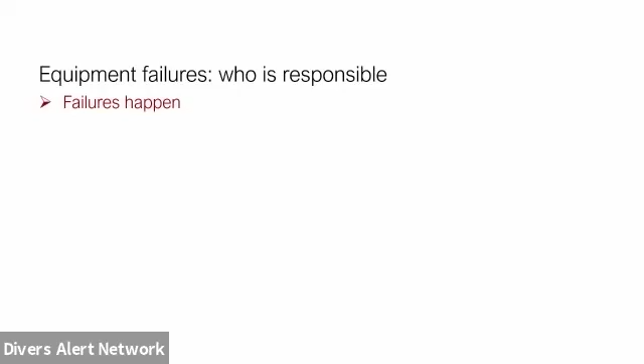But failures do happen. So even though we know all of this, even though people are trained, the equipment is properly designed, and we should know what we're doing, we still have accidents. We have an incident reporting system here at DAN, so we are able to respond to things reported to us. And of course, we also look through social media, look at the press, read reports, and hear other people speak about accidents that they've gone through.

And in the last 3 years, we've had 21 of these, we call them significant accidents, that we've become aware of. Obviously, there are many more that we aren't aware of. But these were enough for us to actually consider what caused the accident and how we can go about educating people, or perhaps speaking to the manufacturers to prevent these from happening again. Because ideally, we want to make sure diving remains safe.

Yes, there are cases where the manufacturer perhaps has one or two shortcomings, but if you analyze the actual incidents and what went wrong, you'll find that the manufacturing flaw in most cases is really only a tiny contributor to the bigger picture. And when we, because I certainly do, discuss these things with the manufacturers.

If they need to make a modification, they consider that. Or in some cases, when these things tend to happen more frequently, they'll issue a safety notice, a recall, and they will obviously make design modifications to ensure this doesn't happen again.

But actually, most of the time, we see that accidents happen as a result of either inadequate training or certainly skills that have diminished over time, people not taking care of the equipment, physically manhandling it or letting it lie around, or not having it maintained as it should be maintained. The manufacturers have good reason for giving you maintenance instructions.

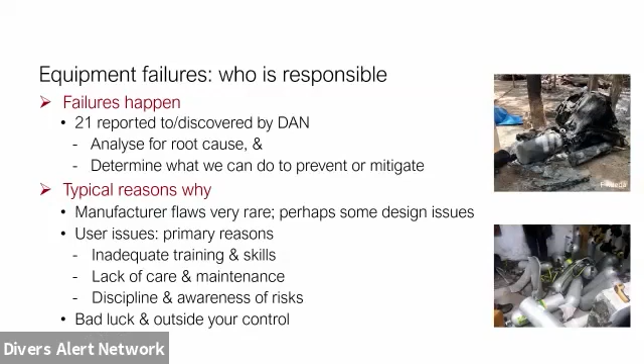Yes, we have to add that there are sometimes things outside of our control, and sometimes it's just bad luck. And bad luck can happen early on in the chain. We can get away with things. We can overfill cylinders many times, and nothing happens. And then one day, if we've overfilled the cylinder, there's a crack, somebody drops something, and that's when the accident happens. So it's a sequence of events.

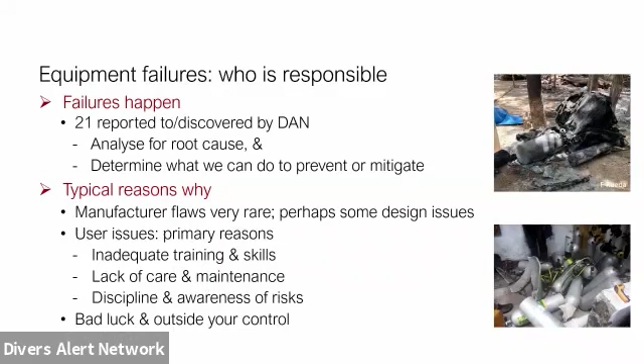So we're going to look at these incidents over the last 3 years. I'll just give you a brief rundown to categorize them, and then we'll go into some degree of detail with some of them. So when I look at risks, my traditional way of looking at anything in terms of a risk is, what is the equipment, the mechanical issue that we face? Is there a fire, an explosion issue? And then what are the human factors? What effect do these things have on people?

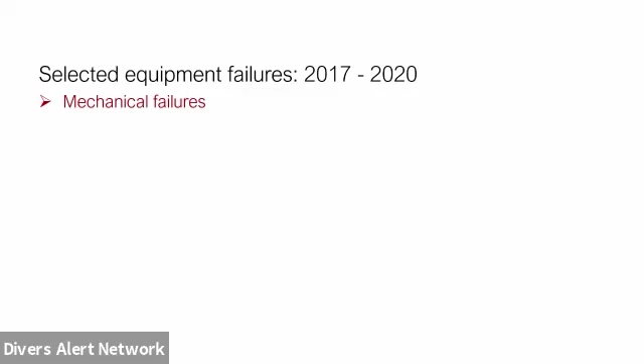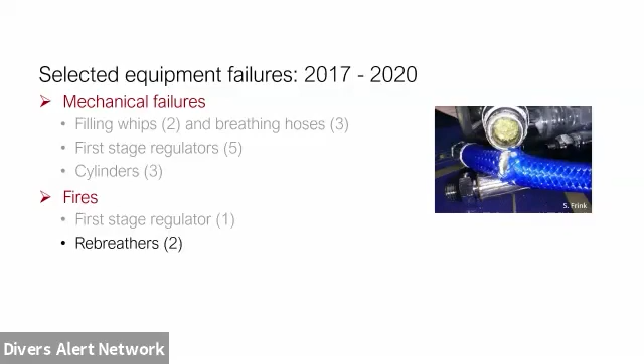Then we've had 3 significant cylinder explosions, and I'll discuss one of them with you. In terms of fires, we've had 1 first stage regulator fire, and that's the one I'll discuss with you, and then 2 rebreather fires. And in all 3 cases related to pure oxygen that was contained in the cylinders.

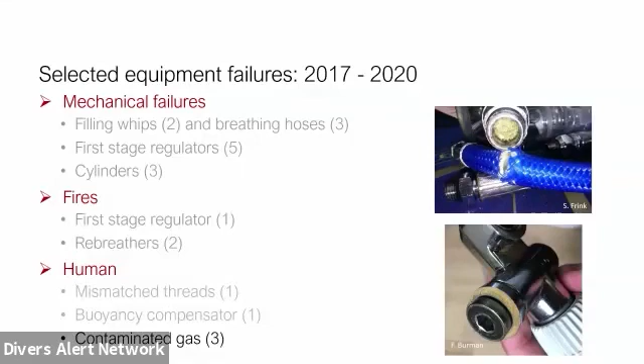And then lastly, human errors, things that we do wrong as people. There's one very sad case with a mismatched thread, and I'll give you some details on that. A slightly less significant one on a buoyancy compensator that failed, and then something that presents itself continuously. No matter how much we bring this to the attention of the diving world, we have issues with contaminated gas. And remember, you're down there, you get to a certain depth, and then the contamination starts to take effect. And we'll have a look at some of that information in a moment.

So let's have a look at the first of our incidents. This happened just before DEMA last year. The person that it affected was a very experienced, let's call him a leader of the diving section at a university in the Caribbean, and filling cylinders is something he still does every day, before the students get ready to go out and dive.

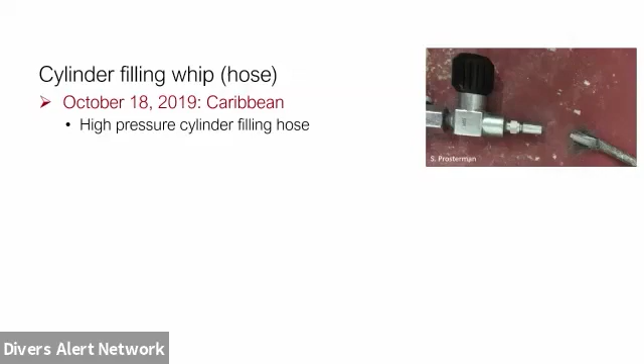And it happened to the filling hose. He was just finishing up filling a bunch of cylinders and something went wrong. So the hose itself was clearly rated for the pressure, 3,300 PSI filling pressure, and the hose was rated to 4,500 PSI, which means pressure tested to about 7,000 PSI.

So it wasn't a weakness in the hose design, I should say. Service history, about 9 years in operation, which in most cases is a good time to start considering changing things, but by no means would we expect a failure. And he does regular visual inspections every time he connected the hoses to the cylinders. He would check that there's no sign of any mechanical damage, but it failed.

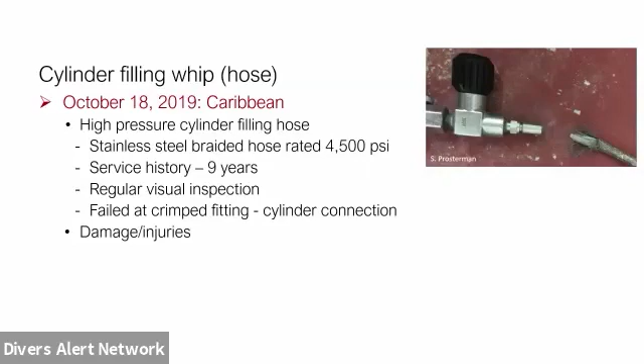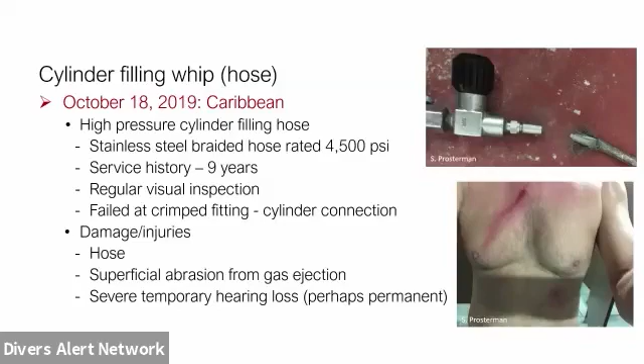So the compressor was obviously still running to some extent, and there was high pressure gas in the hose, and it very narrowly missed his eye. I'm not showing you that particular picture. He says to me, it looks worse than it is, but I think that's enough stress when something like that happens to you. And he is concerned now, and we're talking of a couple of months after the incident, that he's probably going to have some permanent deficit in his hearing, because clearly when hoses break, the noise level is tremendous.

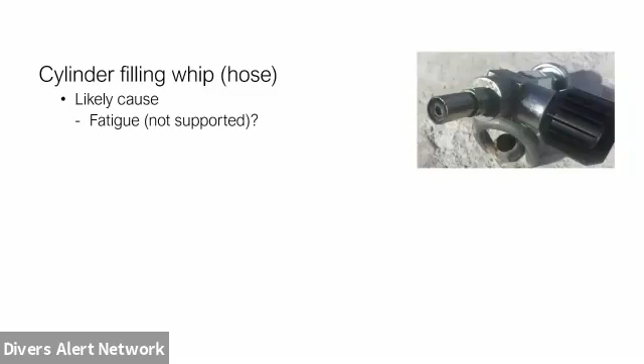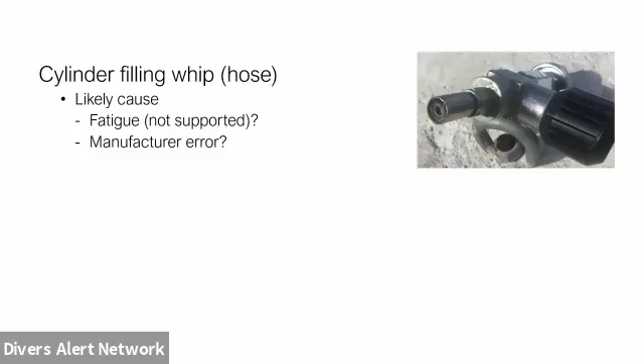Okay, so what would cause this? And it's a difficult one to answer in the context of many of the other examples I'm going to discuss with you. So yes, it could be fatigue, because, come back to this, we don't tend to support our hoses when they are being used to fill. And yes, potentially there could have been a flaw during manufacturing, but 9 years is a long time, and thousands of fills with this particular hose. So one wouldn't expect there to be a manufacturing flaw.

But of course, sometimes it's a very minor flaw that then grows over time. So we can't really state with any certainty what went wrong, but we can certainly make recommendations as to how to either prevent it, or if it does happen, to put ourselves in a position where we don't get hurt. So on the technical side of it, clearly we need to make sure we use certified products from people that we feel we can trust, that have a good track record in terms of safe products.

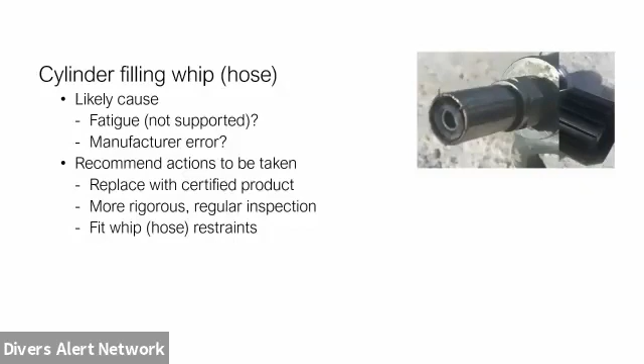We want to maintain our inspections and perhaps look a little bit deeper when we do our visual inspection, when we're coupling up the hoses. If you look at the picture above there, no sign of any corrosion, so nothing that you would immediately say, hang on, this has been neglected. And he says there was no sign of the braiding coming loose at all. But a very wise thing to do would be to fit a whip restraint.

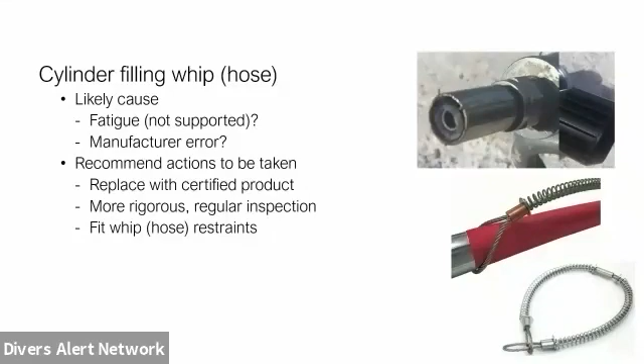And from where I come from, and I've had a fairly long history in not only recreational, but also commercial diving and diving equipment, these are compulsory in many industries. They're not compulsory in the scuba diving industry, but they're relatively low-cost items, and we can fit them to both ends of the filling hose. And if something does go wrong, or somebody opens something they shouldn't open, then it will contain that hose and prevent it from lashing around and causing any injury.

And then very important for those of you that are actually filling the cylinder is to be aware of this risk. I know in the beginning when you fill your first few cylinders, you feel a little bit apprehensive, but months and months later, it's old hat for you, and you really are not going to pay the same attention that you did in the beginning. Always make sure you do visual inspections, perhaps bend the thing a little bit where the joints are, just to make sure nothing's come loose. And most of all, if you don't need to be next to the hose or next to the cylinder during filling, then don't stand around there. So pretty basic stuff. Nothing we can really point a finger at, but again, it happened.

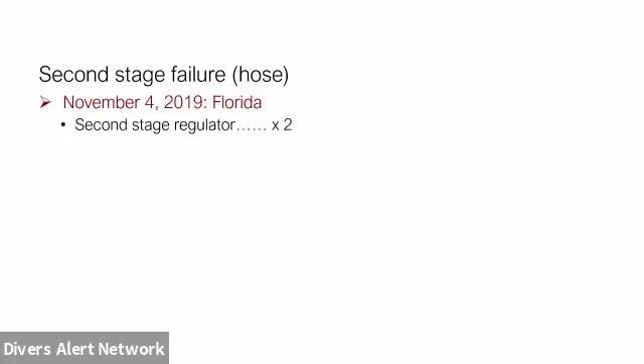Second one is an interesting one, and this is a follow-on from the articles we published in Alert Diver. It actually first started about 5 years ago now, when a colleague of mine had an air out, and so she took the regulator out of her mouth and finished her dive on her octo, which we wouldn't normally recommend.

And when she got to the surface, got back home, she pulled it apart, and lo and behold, we found these what we then called crystals that had clogged up in the hose and actually in her demand valve, in her second stage regulator. So we know about this, and we know it relates to inappropriate material selection during the manufacture of a series of braided hoses that did not come from Europe, and they weren't made here in the US. So we'll just leave that there for now.

This person who reported it to me, I had a long discussion with him on the telephone, and we've exchanged many notes since then. Preparing for a cave entry, he was getting himself ready, took a breath out of his demand valve, and it was clogged. He got a mouthful of debris, which is pretty interesting in itself for the debris to actually migrate through the tiny opening that you have in a second stage. Anyway, he switched to his other regulator and found that he still couldn't breathe properly.

So he surfaced, took the equipment apart, found that he had noticed before that his BC had inflated slowly, which was another good sign. And he had read our articles, and he knew about the failure of braided hoses, but hadn't really paid attention, doing his inspections as you should perhaps have done. He had 3 braided hoses. So both of his breathing hoses were braided hoses, and his inflator hose was made of braided hose construction too. So we have both of the demand valves clogged, and we have an inflator hose that is soft and squishy. So he started to put things together.

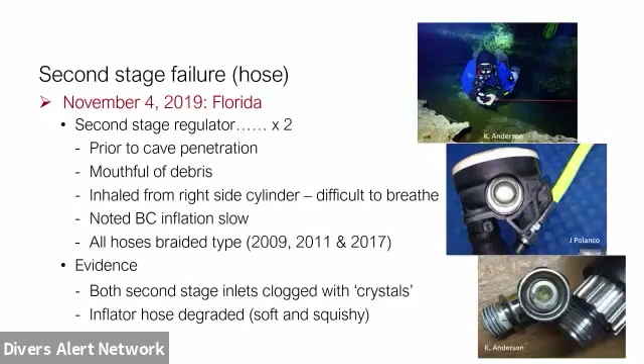When he inspected the hose, he realized that this thing wasn't working as it should work, or certainly didn't appear to be in the condition it should have been in. So the likely cause, well, we know about degradation of braided hoses, and this is what had happened to his BC inflator. But the mystery is, he sent his equipment to us, and I sent the hoses back to the manufacturer, because these were certified hoses from somebody that we work with. And they wrote straight back and said they've cut this thing into pieces. There's absolutely no sign of any degradation, any particles, any damage whatsoever.

So that's interesting. He definitely had an air out. He had his mouth full of debris. So something clearly went wrong. And we could see clearly that the inflator hose had degraded with time. So it's now a mystery. And it is a mystery until we're sitting in my office, and I got a hint from a colleague out in the Caribbean who said to me that they'd seen some similar things before.

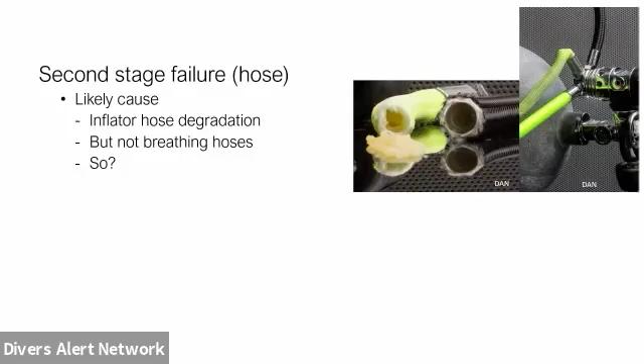So another colleague of mine in my office decided to experiment with this, and we attached the degraded hose to a regulator, the same as the diver was using. And we attached the breathing hose to the other side, and then I wiggled it around and let gravity do some of the work for me. And lo and behold, we got crystals coming out the other side. So what you can see over there, and I'll show you another picture in a moment, is the regulator that was used, but it's not unique.

There are many regulators that have the same feature, but the gas goes through from the high pressure to the intermediate pressure stage, the hub at the bottom, and that connects to your breathing hoses, your inflator hose, your dry suit inflator, and it has a common area. So if one hose were to fail, in this particular case, degrade so that those pieces of degraded plastic start floating around, then when you get to the surface and you purge, you're going to get flow in the direction of the purge. So the particles will move from where they started from through the regulator into the other hose.

Or when you're carrying your equipment, shaking it around, or just purely from gravity, these crystals can actually migrate. And I call them crystals because that's what they look like, but they're actually just hard pieces of brittle plastic. So really important to do your inspections. In our articles that we published, we gave you some clues as to how to go about checking your braided hoses. They're great. They're nice and flexible. They take the strain off your mouth when you're diving, but one just needs to pay attention to them. If you buy the reputable types, after 2009, certainly we find that we haven't seen any significant failures. And I say significant because sometimes it's hard to actually tell when the hose was made.

When you send your regulator in for maintenance, please make sure that the techs report anything that they find to you, especially if you're a bit concerned about things that weren't working as they should work. And lastly, be aware of what this issue is.

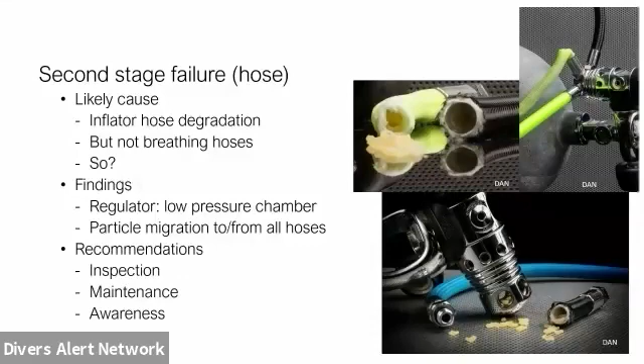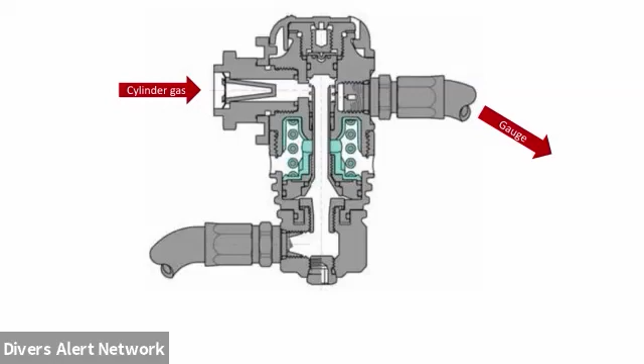And just to illustrate it a bit more clearly for you, here's a cross-section of a regulator. We can see our high-pressure cylinder gas going in through a filter, so the particles can't come from upstream into the breathing section. Of course, you've got your pressure gauge also connected to the high-pressure section.

Then we have our regulating of the pressure down to your intermediate pressure, and from there it gets distributed from a common area. So the pressure to both of your demand valves, your second stage regulators, and to your inflator hose, or if you have two, one for your dry suit and one for your BC, they all come from a common port.

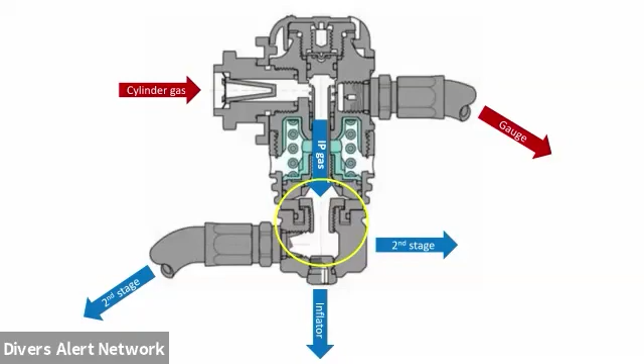And it's not for us to say it's a design flaw, it's just a characteristic of how the design is done. And the degraded hoses have been a feature only for the last 5 years, and as people get more and more aware of them, they're paying more attention, but certainly something to be aware of. So practice your buddy breathing and make sure that you're equipped. If something goes wrong with breathing, you have plan B.

Okay, the next one is an interesting one, for those of us with aluminum cylinders, you might call them, not from where I come from. Obviously with time, and certainly the presence of chlorides, they will start to corrode, producing a white aluminium oxide powder. In itself, not a big problem.

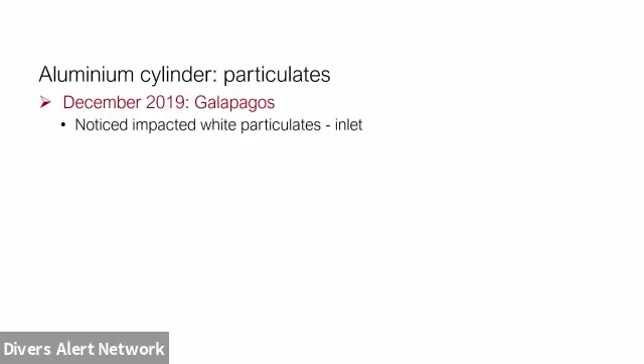However, in this particular case, the diver was on a liveaboard in the Galapagos Islands, great place to be, and she noticed white particles on the inlet to her first stage. That was a bit strange, so she took a toothbrush, wiped off the external particles, not realizing, of course, that there are particles on the other side of the filter. And she went back diving, and a few days later noticed the same particles on the inlet. So where would the issue be, and now what is likely to go wrong?

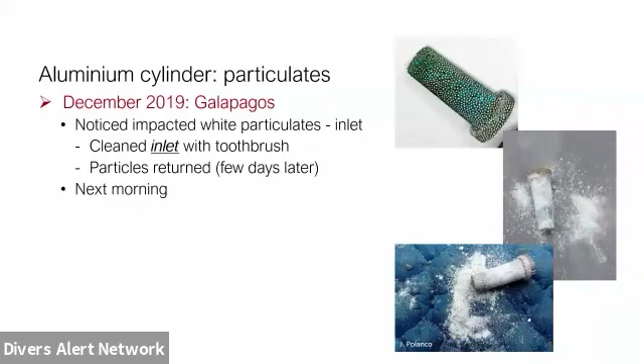Well, after her last dive, she woke up the next morning with no voice. She was coughing, her airways were burning when she was trying to breathe in, and she'd also developed an ear and eye infection, although we don't see a correlation there. So she returned home, went to see her doctor. He assumed it was a form of pneumonia, all the signs were there, gave her antibiotics, and 7 days later, her lungs were still burning.

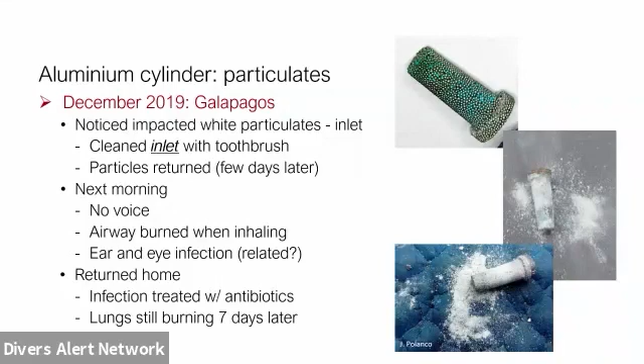So there was something really, really strange here, and we got the report, obviously, after all this had happened. So, okay, aluminium oxide powder, we know it's produced in the cylinder. The powder can range from 1 micron up to 10 microns. Of course, if they make aluminium oxide, you can make any size you want. But the powder we see, some of it can migrate through the filter. Your inlet filter is usually between 6 and 10 micron pore size. So anything less than 6 microns is going to migrate through the filter as a powder.

And she had noted, I should have mentioned it on the last slide, that on the inside of her second stage, she saw this white powder. And we've actually had another case recently where it was a brown powder on the inside of the breathing regulator. This is a long-term accumulative effect. The picture you can see over there has happened over many, many dive cycles or pressurization cycles, and clearly not good maintenance.

What we know from the medical theory, and I'm just going to quote it, I'm not a specialist in this particular regard, is that particles larger than 5 microns tend to irritate our upper respiratory tract. So that will be coughing, burning throats, and anything else that gets stuck in the throat and makes breathing difficult. The particles smaller than 5 microns, which we know we get, and you can see the dirt on that filter, the oxide is on the inside, it's not in the inlet.

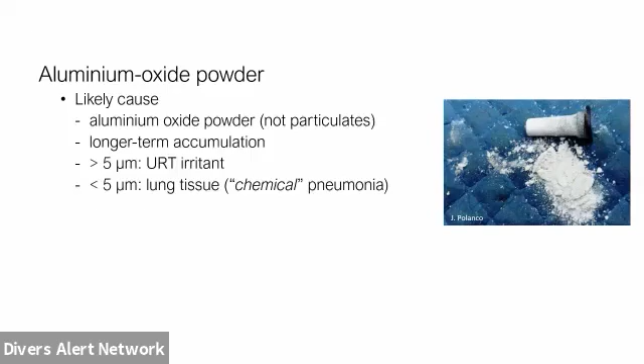When it's smaller than 5 microns, it accumulates in our lungs and the alveoli, making it difficult to breathe and causing an inflammation. So all the signs are there of regular pneumonia, and for lack of another word, we dub it chemical pneumonia. And of course, those with some form of respiratory weakness are going to suffer even more.

If you look at the standards that we set for particles, it's actually not very well documented. A lot of work has been done, and I actually published a fairly in-depth article in the last Alert Diver if you're interested in learning a bit more about this. And they usually clump it together with oil and other particles, so they're not very well maintained and monitored as time goes on. But generally speaking, we don't get dust getting through.

So a real good clue is if you see any form of white powder, brown powder, black powder on the inside of your second stage regulator, please be aware that should not happen. Nothing should come down your breathing hose, and catch that in time before you end up with an issue. Clearly, things need to be serviced. And again, I put that picture up there for a good reason, poor maintenance. I don't know how many years of use that particular first stage regulator had.

And then just 2 notes to add for you. A lot of things are said about aluminium oxide and people that work in aluminium factories and people that are metal workers with aluminium, that aluminium is carcinogenic, that it can be toxic, that it can actually cause Alzheimer's. But this is all anecdotal reports, and I've actually myself been involved on the Alzheimer's side with people working for me that then reported with this. But there's no scientific evidence to support this.

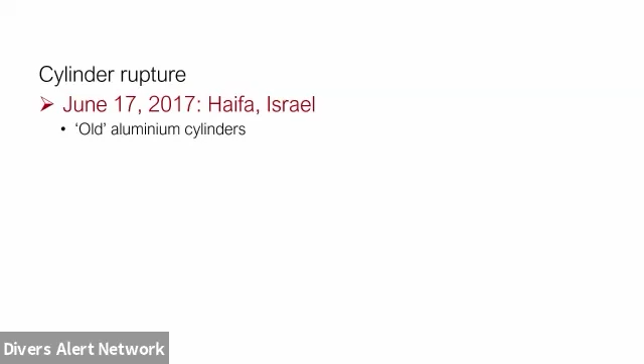Okay, here's a very sad case, and it gets played over and over again, and it's sometimes really difficult to come to terms with why people don't learn these particular lessons. So this one happened in Israel. We got some pretty good reports because one of our colleagues was flown over there to actually investigate what had happened. And I refer to these as the old aluminium cylinders.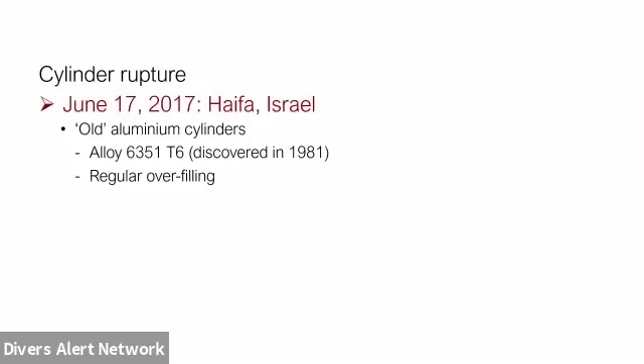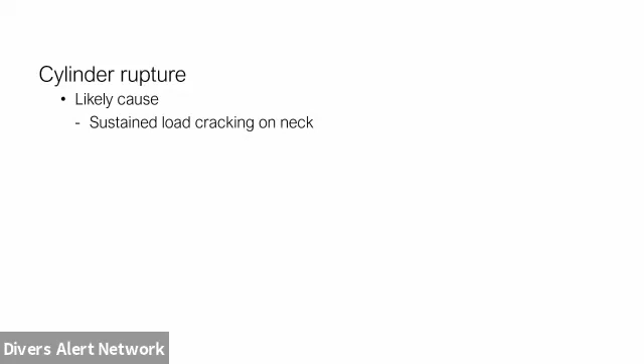We know that the sustained load cracking doesn't happen in every single cylinder, but that's why you have a visual inspection requirement that must be done annually, and this is what they look for. Here you can see, hopefully it's clear enough for you. I can't get the mouse to work. You can see over here, try it like that. You can see the crack running down over there, which we're trying to highlight.

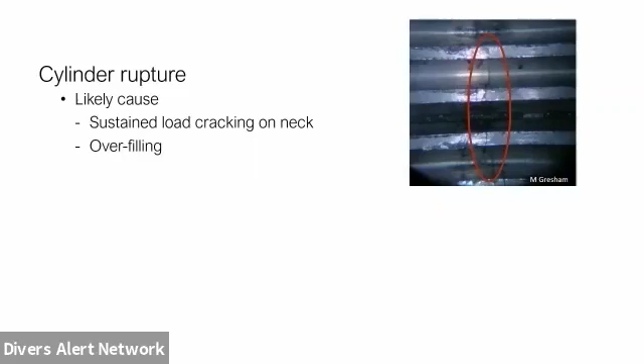And all that requires is a degree of overfilling and some abuse, and obviously lack of inspection to pick it up before the time. And that day, after years of overfilling, physical abuse, we suspect lying in the sun for long periods of time, which over a long period of time will start to anneal the aluminium. Well, that was unfortunately the day that it happened. So we know for very good reason that the requirements are to do your visual inspection annually.

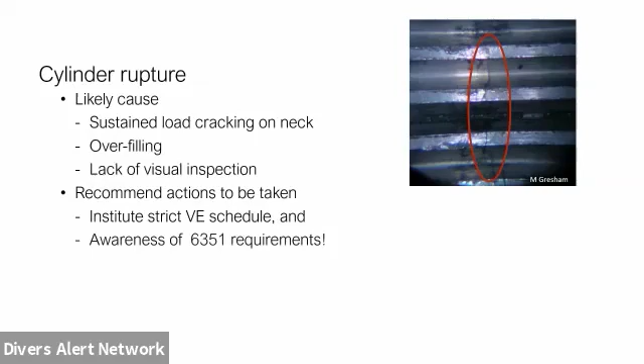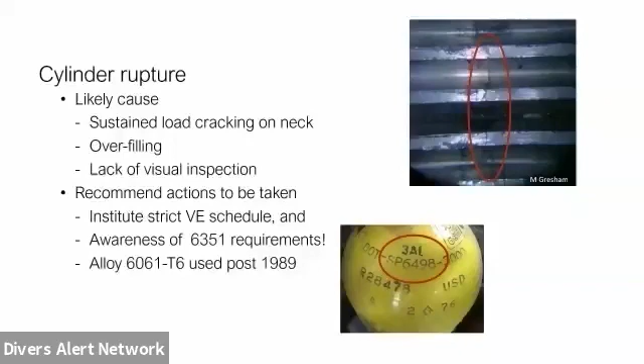We also want you to be aware of the 6351 requirements, and unfortunately, the cylinder is not marked with the same number of digits. So 6498 refers to the special permit issued by the Department of Transport. It's not the alloy of aluminium. The 3AL stamped above, together with that special permit, tells us that that's still 6351. Since 1989, all the manufacturers that make these cylinders are using the 6061 alloy, which doesn't have the weakness or the propensity to have sustained load cracking in it.

And just to fill in the last blank, make sure that when you get your cylinder, if it is aluminium, and I'm talking now more for the professionals, the filling station operators, look for the year of manufacture. If the year of manufacture is after 1989, then we know for most of our cylinders it's going to be made of the right material.

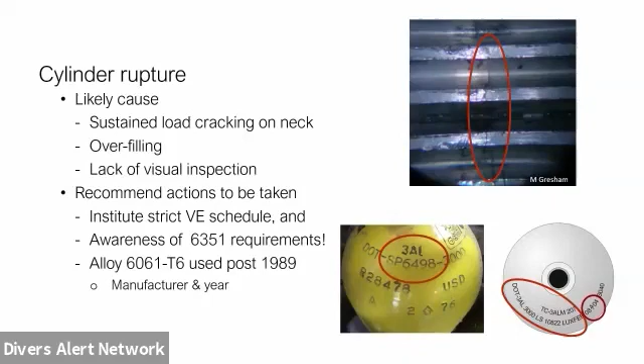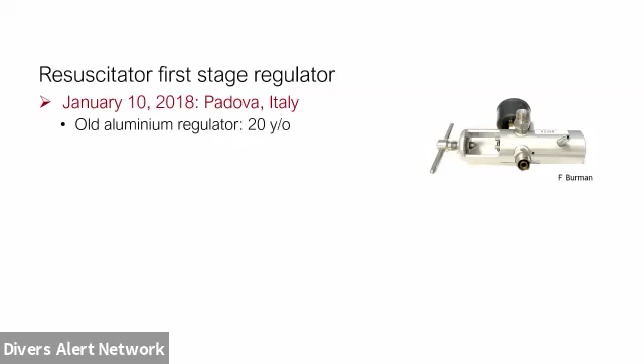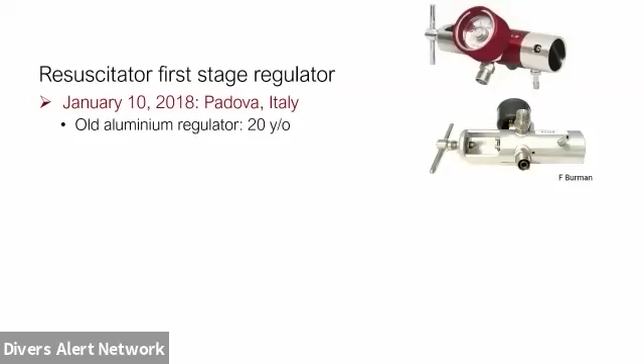Okay, let's have a look at a couple of fires that have occurred and that we've managed to analyze to some degree. So this one was a very old aluminium multifunction regulator used in our Resuscitator kits, and it was actually being used to train on one of the DAN emergency oxygen courses. Now you can see the aluminium one there. That was withdrawn from service many years ago and replaced with a brass multifunction regulator. So those of you that still have aluminium multifunction regulators, they're old, you really do need to replace them. I've seen boxes of these regulators at some of the testing laboratories, all of them having shown signs of fire on the inside.

So they're doing the training. He opens up the cylinder valve, and now the reports get fuzzy. And this is always one of the interesting things in accidents. First-hand reports, witness reports, and then the reports that come in a bit later, almost as if people are trying to cover up for what they perhaps did wrong. And the first report I got said that there was a leak on the demand valve hose, which they then fixed by tightening up the hose under pressure, which in itself is not a wise thing to do.

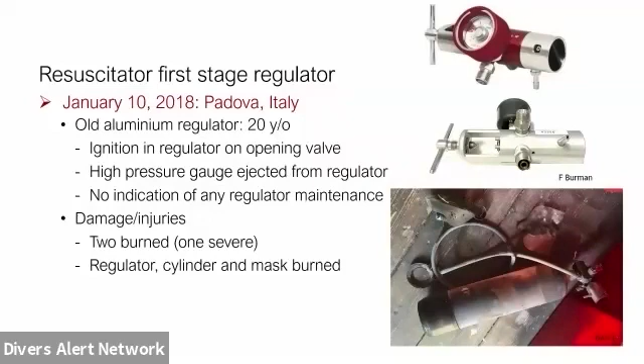But there was a fire and it blew out the gauge. We don't even know where the gauge ended up. And clearly you can see that all the equipment has been burned over there. There was no sign of any maintenance done on this regulator. It was dirty. There were still parts of contaminants that hadn't burnt on the inside when they analyzed it. Both the student and the instructor were burned, the instructor particularly badly. So not something that we want to take lightly.

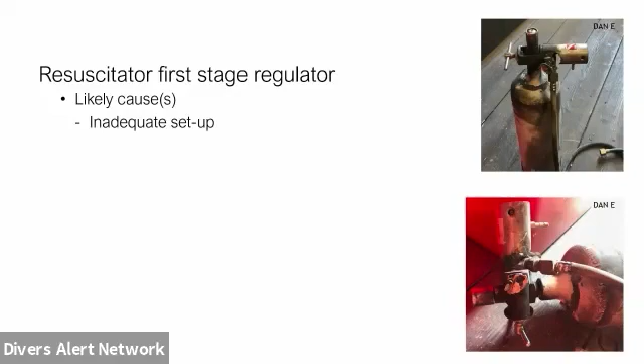Okay, when it comes down to causes of fires that relate to any oxygen application, we have three parts of a triangle that we can identify and hopefully come to a better way of dealing with this. We need a source of fuel, typically contamination. We need a source of heat, that's the part that's a mystery. And then obviously we are bathed in oxygen.

We can't avoid that. Contamination, usually in these instances, is fingerprints, people touching the pin index valve on the cylinder or using the thumb to locate the seal on the regulator itself. Could be some inappropriate grease, could be dust. Difficult to pick up afterwards what the fuel source was. The trick here is the ignition source. What actually causes the fire to start? With flow-related issues, we're looking at flow friction, which means rapidly moving oxygen, but that shouldn't happen in this case because an oxygen cylinder valve is designed to limit the speed of flow through the line and through the parts after that.

Particle impact and adiabatic compression are the two that we are more or less settled on as being the main causes of oxygen fires in our industry, in the scuba industry. Particle impact usually comes from inside the cylinder or could be dirt when the cylinder was last serviced. We don't really know where they come from unless they're on the outside.

And adiabatic ignition, heat of compression as we call it, occurs in this particular instance when we open the valve too rapidly and the gas starts to move at great speed from the high pressure cylinder and then all of a sudden comes to a halt inside the regulator because the regulator is not flowing at this particular time.

We cannot state with certainty what happened. We can't even state with certainty what the fuel was. We can see where it occurred, and then from there we have to add the elements up. But it can be avoided. Each one of these cases, there's been a human interface that has caused the issue. So very important to pay attention to the setup.

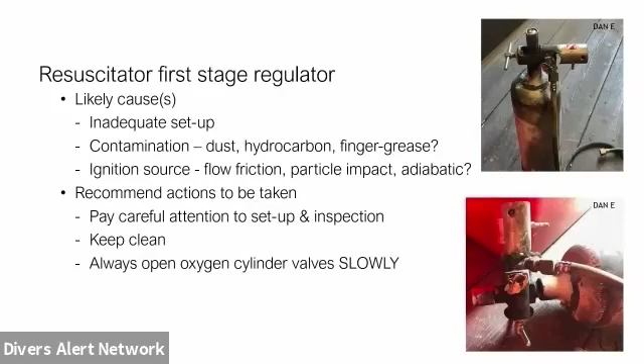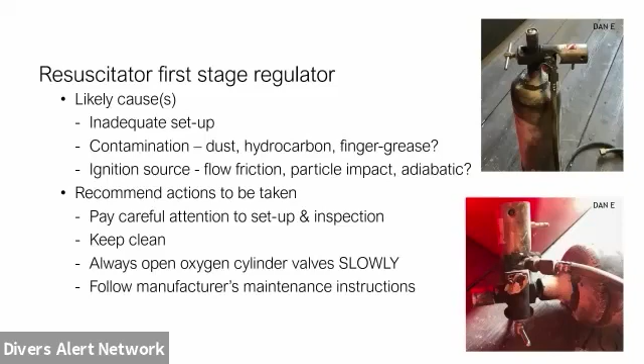Okay, and clearly manufacturers study their products, or when they're doing the design, look at the things very carefully and decide which are the parts that need to be serviced. And they are very conservative, knowing that some of us abuse these things. So the service intervals that they recommend are really important. You can stretch them, sure, but it's when we stretch them or forget about them that things go wrong and we have our failures. Now let's have a look at a rebreather fire.

I know there was one that they had in Bonaire earlier last year. This one happened to be in Mexico. They were doing cenote or cave diving. Very, very experienced diver. Again, in most of these cases I'm reporting to, I've personally spoken to either the person that was involved in the accident or some of the witnesses. So our information is pretty accurate, although, as I said before, witness reports tend to change with time.

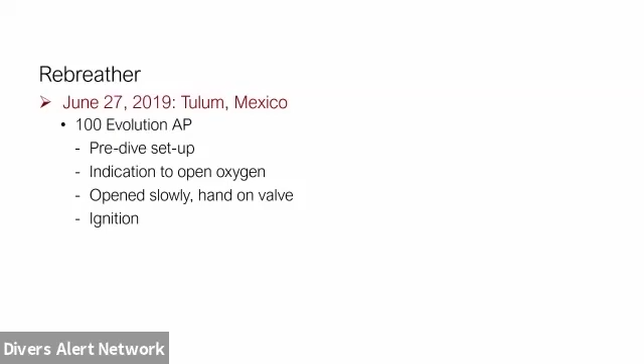So he had a great rebreather, very well maintained. He knew what he was doing. He was getting ready on the land, still doing the setup, and the instruction is open the oxygen. So he opens the valve slowly because he knows what slow is, and there's ignition. So he was badly burned.

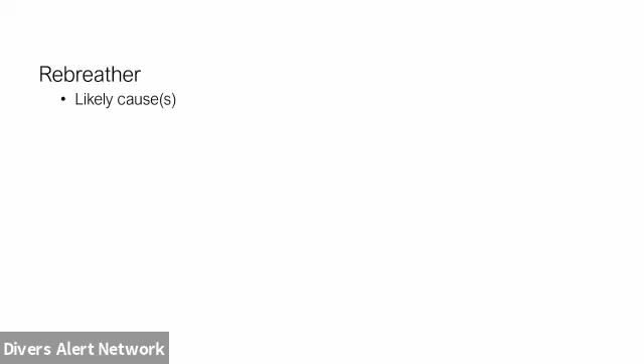He was concerned because he's experienced, he knows about oxygen cleanliness, he knows about contaminants, and the only thing he could think of was that you don't travel with your oxygen cylinders for your rebreather. They rent them when they get to the dive destination because you can't travel with oxygen cylinders that are full at any rate. So he says to me, could it be some contaminant in the cylinder itself?

And the answer to that is unlikely, because anybody filling oxygen cylinders knows about the hazard and generally are going to work very safely and very cleanly. The oxygen itself will certainly not be contaminated, but yes, it is possible that there could have been dirt or dust on the cylinder valve that got there from the transporting. Maybe that cylinder was left lying around for a while and accumulated some dirt. So perhaps particle impact could have been the cause.

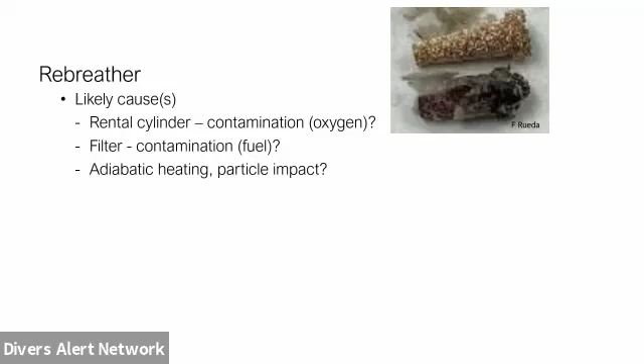So the general rules apply. Keep things clean. Make sure that whatever lubricants or sealants you use are compatible with oxygen. Please, for those of you out there that think working with nitrox is not the same as working with pure oxygen, that's not correct. Most of the codes and standards, if you read them correctly, and I'm not talking about industry information passed on, I'm talking about the regulatory codes found in the CGA, the ASME, the ASTM, all the known regulations, and included in OSHA, you just need to read it correctly, say that anything above 25% should be handled as if it was 100% oxygen.

And that means too that the parts, the components that you use, need to be designed and compatible for use with oxygen. And then obviously limit anything outside of your control. If you have an oxygen system that you're diving with, you want to make sure that it never leaves your sight, leaves your control, and that you're sure that it's safe.

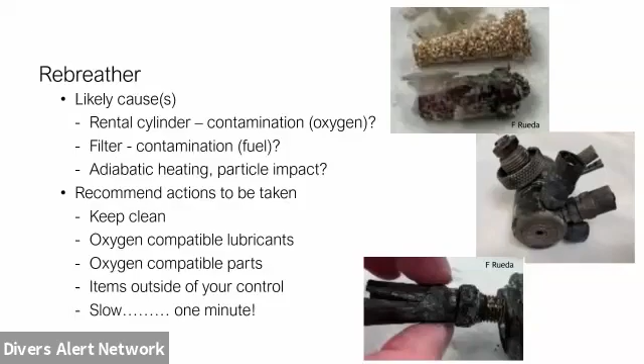And then I come back to this one and I use the word slow again. We tend to think slow as well: I'll just kind of open the valve until the hiss goes away and then I'll open it fully. Well, in the industry, slow means 1 minute from when you crack the valve until it's fully open. And I ask you, how many of you actually follow that particular rule? And then when we have a stiff valve, the valve won't open and we strain to get it open. Then of course, rapidly the valve opens. And that's, again, one of the areas where these things are going to start from.

Okay, the last of the categories is what we call the human errors. When I say human error, I mean gross human error related to equipment. So I'm not talking about training and other things at this stage. Another really tragic case happened in Belgium a couple of years ago. Easy to analyze afterwards; hindsight is perfect sight, or nearly perfect sight. But in this case, it was an aluminium cylinder made in Europe with a European metric thread. You can see the thread type there, 12.7 threads per inch. Good number to remember. 60-degree form, the angle of the actual thread itself.

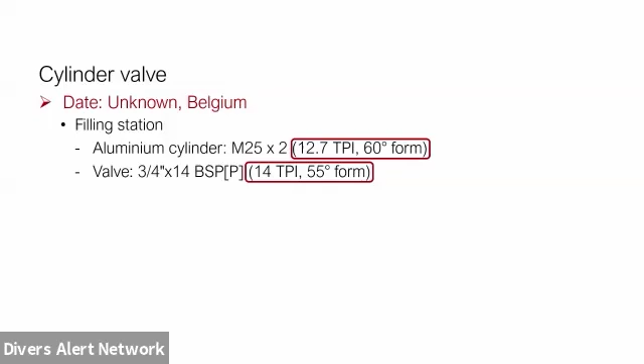The valve was also a European valve, but it was the old imperial type, the 3/4 inch BSP, British Standard Parallel Pipe thread. In this case, 14 threads per inch. So for a given length of thread, there are more threads than there would be in the cylinder. In this case, a 55-degree form. I ask you, how do you get those two things to mate? And all I can tell you is I'm told that with a wrench, almost everything can be made to work.

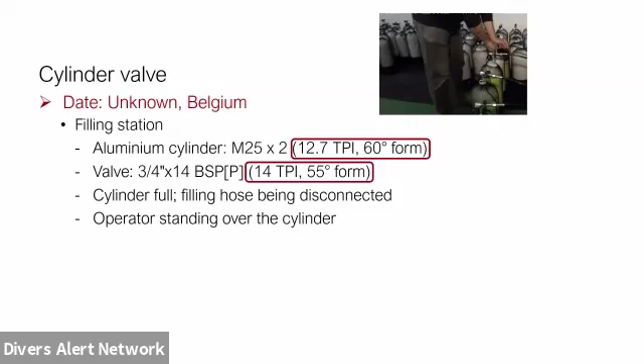In this particular case, we don't know how long that equipment had been in service for, but the hose was being disconnected. And sadly, one of the rules we follow is you don't stand over the cylinder when you're removing the filling whip. And there was a violent rupture. You can see there's a valve that has flown out the top of the cylinder. That's an accident that happened in Australia, but it's really just a good illustration of the valve physically shooting out the top of the cylinder.

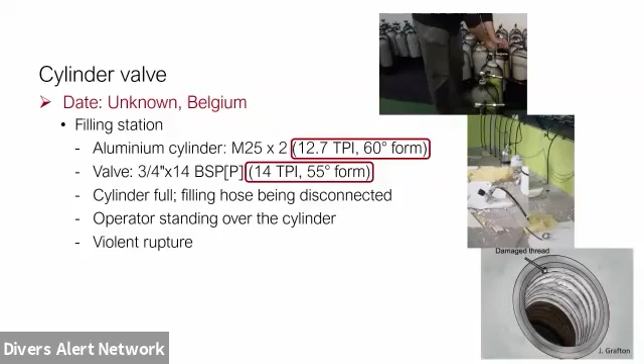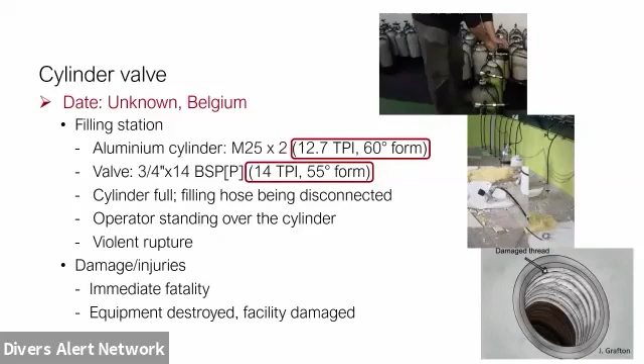It doesn't break immediately, but obviously with time, some degree of fatigue, filling and emptying the cylinder, maybe some heat, maybe some mechanical damage, and it flew out. And sadly, he was killed immediately. And most of the facility around there was destroyed.

Okay, so what caused this? Well, as I said, hindsight is perfect sight. But we found out that they bought the valve. He was told to buy a particular type of valve because it was better than other valves. Well, I won't argue that one, but I don't think so. He bought it separately from the cylinder, and he had no idea of the fact that the threads are different.

So he obviously put these things together, but now we're not looking at the diver. Now we're looking at the filling station operator, who was clearly very experienced, had been doing this for many, many years, but this one must have slipped by and he just didn't check. Again, not that easy to check. We can see the material of the cylinder. We can perhaps figure out where it came from to then figure out what the thread type is.

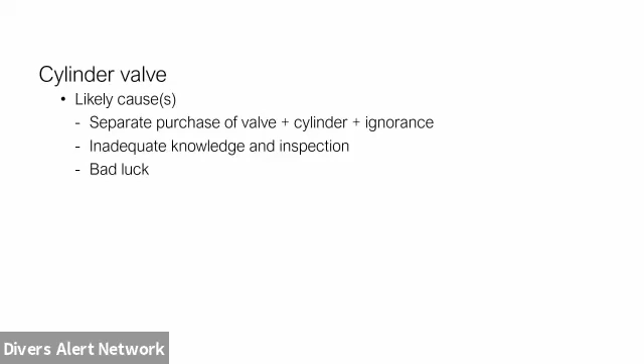In Europe, the cylinders are marked M25/2 on the neck of the cylinder to tell you what the thread type is, and the valves are marked. So in theory, in Europe, you shouldn't make this mistake, but they do. So very important when you're filling a cylinder to be sure that the valve and the cylinder belong with each other. If it's your equipment and it belongs to you, you clearly know that. But when you're filling other people's cylinders, these are things that you should be looking out for.

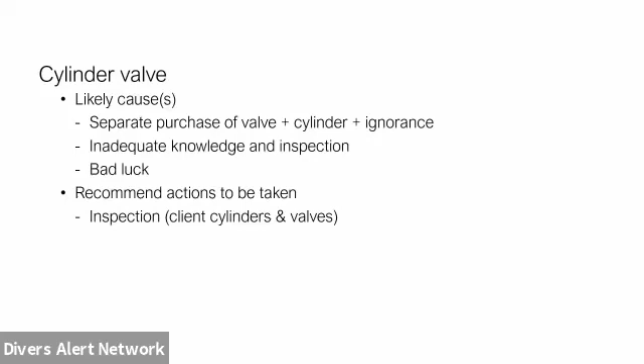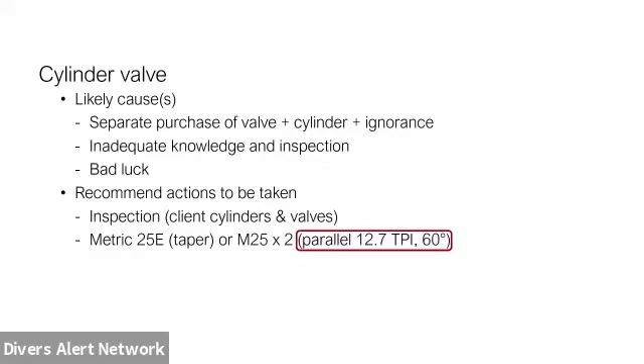In Europe, we get metric threads. We get the 25E, which is a tapered thread used in steel cylinders, and we get the M25, so easy to get those two mixed up. But the M25/2 is the parallel thread. Remember, 12.7 threads per inch, 60-degree angle, clearly marked on the cylinder.

And here in the US, we use an imperial valve thread type, the 3/4 inch NPS. So again, we're going from BSP to NPS, it gets pretty confusing. And in this case, we have 14 threads per inch and 60 degrees. So the only difference here is the pitch, the threads per inch, that are obviously not meant for each other. And theoretically, they shouldn't screw in.

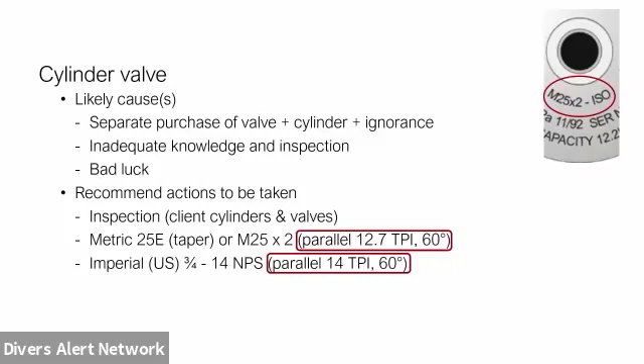But you know, when you've done it the first time and you remove it and the thread has been damaged in the cylinder, it's much easier the second time. And then you don't bother to actually inspect your threads. But knowing that that should be stamped on the actual cylinder, and I know it's not common practice, it should become common practice. The ISO standards are indicating we should be doing this, but very easy in that case to see that I've got an imperial thread on my cylinder valve and a metric thread on the actual cylinder.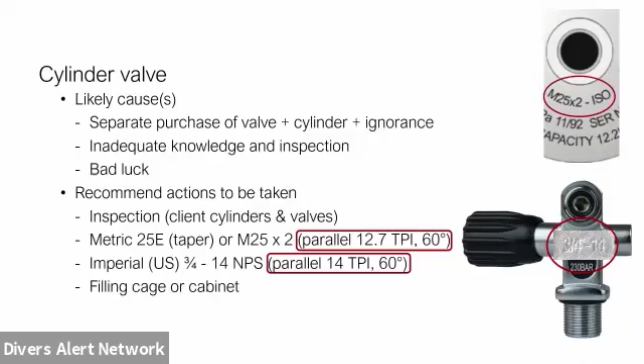And then this is another good reason for having your filling area isolated, perhaps in a cage, a filling cage. Certainly, people that are not meant to be there should be kept away from that area, and back to the inspections. Make sure as a filling station operator that you give the equipment you're filling for other people a good inspection to make sure that you're not going to end up as this unfortunate individual ended up.

And he goes diving and he's down at 45 feet of seawater, filling his BC, and the tear opens and he loses all the air in his BC. And as I said before, accidents are normally a series of things. So in this case, he was overweighted. He did manage to dump his weights, made an uncontrolled ascent, but was asymptomatic when he came out. So he had no physical symptoms, just some degree of hurt pride when people found out what he'd actually done and called him a fool.

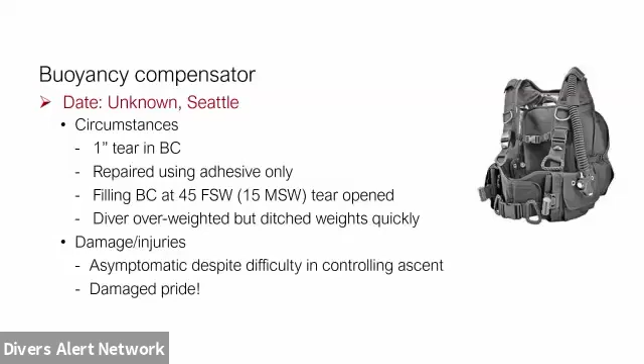So, sometimes we do stupid things. Are there any of us that haven't perhaps climbed up a ladder at home with an electric drill in our hand to drill holes in the wall? We've all done things that are perhaps not that safe in hindsight. Okay, and then the last one I'd like to discuss with you today is the contaminated breathing gas.

And this is a pretty scary one because some of the contaminants, certainly the carbon monoxide, we cannot actually taste or smell or feel or see. I mean, it's completely impossible to tell that it is contaminated unless you use an analyzer. This incident happened in the water. The diver was down at somewhere between 20 and 30 feet of seawater, down for about 6 minutes.

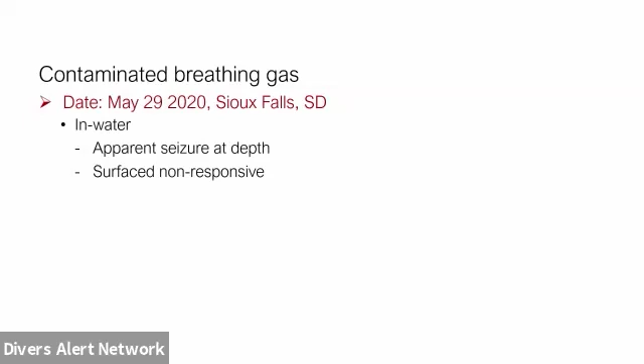His buddy, his wife, actually, they noticed he looked like he had a seizure. He went up to the surface uncontrolled, got to the surface, clearly was lifeless. They managed to get the EMS in, so there were 10 or so minutes at least for them to get to where he was, and they resuscitated him. So much so that he called me about a month later or 2 months later to say, look, this happened to me, where do I think the issue is?

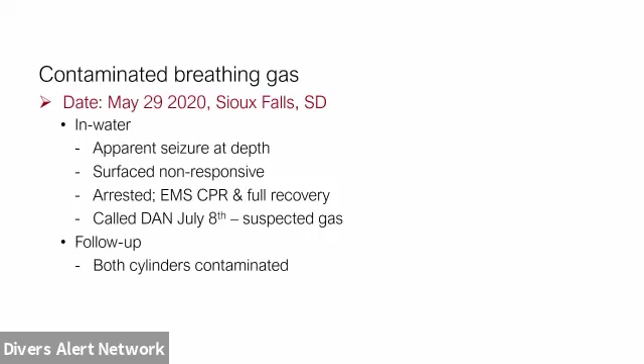And just speaking to him on the phone, he said, I could smell this. The air doesn't smell that great, but it wasn't anything that I didn't think that I could dive with. Big lesson to be learned out of that. So we had him send his cylinders off to be analyzed. They both came back with epic failures stamped all over them. So clearly the gas did not comply with the standards that are there for very good reason.

So for those of you in the know when it comes to air quality testing, we know that the limits for carbon dioxide are 1,000 parts per million, carbon monoxide, 10 parts per million, methane, 25 parts per million, and odor, none. And have a look at what we found on this one of the two cylinders. Over 3,000 parts per million of carbon dioxide, but we can deal with that. And even at 2 atmospheres or 3 atmospheres, we can manage that level of carbon dioxide.

Carbon monoxide, 500 ppm. At 2 atmospheres, that's equivalent to breathing 1,000 ppm on the surface. My only question was, how did he last 6 minutes breathing this contaminated gas? Methane is generally an asphyxiant, although it could also be a fuel. So at that level, it's certainly dangerous, but not in the short term going to be the cause of his issue. But strong odor, real clue.

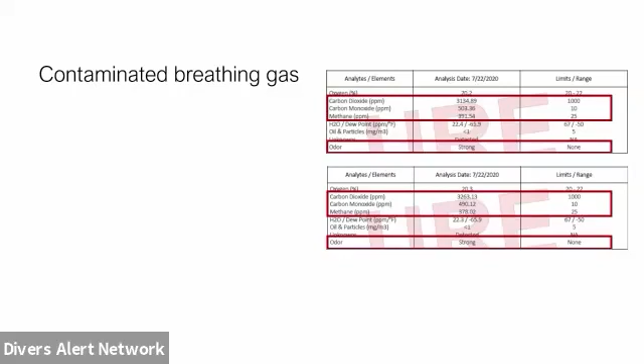So if you smell anything, if there's any smell, if it comes out of the second stage, then take off the first stage regulator and smell the gas in the cylinder. If there's any odor in the gas in the cylinder, something is not right. And the second cylinder, a little bit more carbon dioxide, a little bit less carbon monoxide. Our accuracy in measurement, or the resolution of measurement, allows for a couple of ppm either way. So basically, both of these cylinders have been filled from the same source.

Okay, so clearly, if you look at the different types of contaminants, this is not a problem in the compressor. It's not likely a problem in the filters, because the filters generally don't remove carbon dioxide. So we're not expecting it to be absorbed. So the carbon dioxide is coming from outside. And even if this filter had been fitted with the carbon monoxide filter, the Hopcalite catalyst, those catalysts are designed to handle 20, 30, 40, 50 parts per million maximum. And after that, they cannot catalyze out all the carbon monoxide. 500 ppm after that filter indicates really very drastic contaminants.

At that particular filling station, no record keeping of their fills, no history of air quality testing. So really not a great place. And someone else made the point, I think, in one of the lectures before me. But if you're not sure about the quality of the gas that you're getting from a shop, for whatever reason, take the time and trouble to ask them to have a look at what goes on. Is it neat and tidy? Does it look like it's controlled, or is it filthy, covered in oil, covered in dirt, things lying around?

Pay attention if there's an air quality test certificate up on the wall, that it's in date, and that they at least are testing the air quality, which just means that they are paying attention. It doesn't mean that the air is safe, but it means that they're paying attention and understand that contaminants need to be protected against.

So my first point to him was, please call the filling station. He didn't want to identify who they were. He happened to know them. And tell them, because if they're still filling air, whatever surrounding conditions occurred, because this is unlikely to be the compressor or the filter itself, it's coming from somewhere in the surroundings, that they know about it.

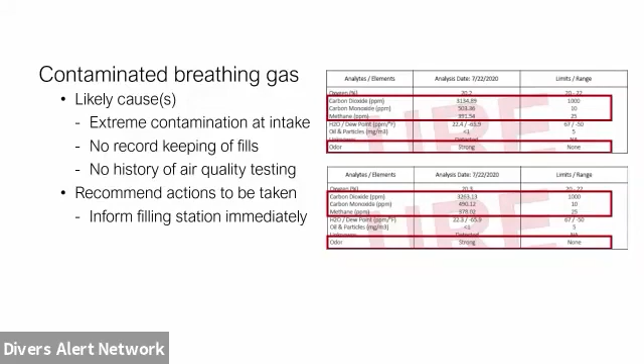And so they were warned, and they then moved the location of their compressors. And for all of us, gas should not smell bad. Doesn't mean that if it smells bad, it's going to have carbon monoxide. It doesn't mean if it doesn't smell, there isn't carbon monoxide. But unless you're very unfortunate, carbon monoxide is going to come with a bunch of other things. And in those other things, there's most likely going to be something that smells.

So if the air does not smell right on your demand valve and your second stage regulator, switch off the valve on the cylinder, take off the first stage, crack the valve and smell the air in the cylinder, and make sure that it's not because your equipment's just been serviced. Maybe there's still a little bit of moisture on the inside, which you can then purge to get rid of, but you don't want any odor in the gas inside the cylinder.

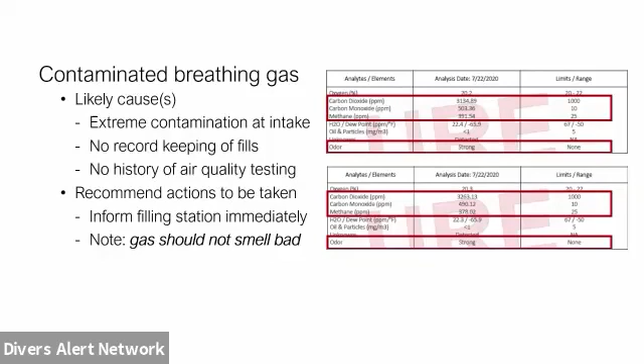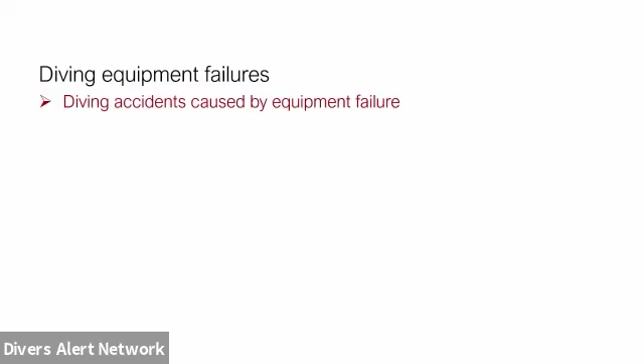Okay, so just a couple of points to bring all this home into a common place where we started from. So we have diving accidents that are caused by equipment failure. And the question is, why did the equipment fail? And we know in some cases, yes, there is a manufacturing issue, but generally very isolated. In terms of the hoses, we did reach out to the diving community several months ago with another Facebook posting, and we got a whole list of people who wrote in and said that they had very similar failures on the hoses. So we know about that particular issue, and we know what it is, and we can give you information as how to inspect against it.

But it all comes down to awareness of risk, of training, of appropriate training, of remembering your skills, of not becoming complacent when you go diving. It's really important. That's why we have buddy checks. It's really important that you do them consistently, correctly, each and every time. And we don't just do a cursory glance to make sure, well, everything looks fine. Because the day that we didn't do the buddy check is the day that there was a problem. It's the day that our second stage wasn't working correctly and the buddy's octo wasn't working correctly. And that's where things really go badly wrong.

So yes, equipment does fail, but most of the time it results from us not paying attention, being aware of issues. And when we cause the equipment to fail, it's generally based on ignorance, like not knowing there's a difference in the thread of the cylinders, or if we're at a cylinder filling station, not knowing that the old 6351 cylinders need to be inspected annually, meaning there should be a visual inspection indication on the cylinder that it's in date. It's thinking that we know it all. We've been doing this many, many times, and so we're completely in control of what the risks are. And at the end of the day, just a degree of stupidity where people should ask questions and they don't ask questions. So remember, the only stupid person is the person who doesn't ask the question.

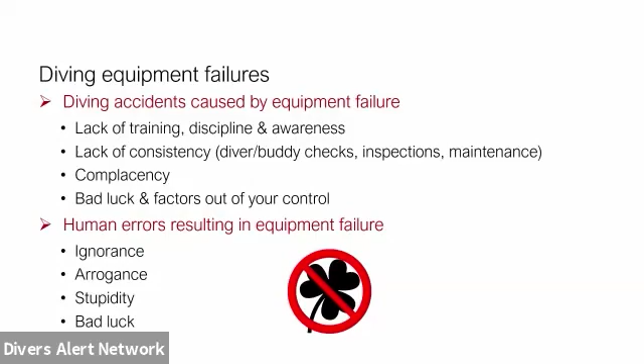And yes, the luck of the Irish might desert you on that particular day. You didn't get your 4-leaf clover. So there is bad luck, but in most cases, we could have avoided the bad luck. We could have mitigated the bad luck. And we can certainly take care of the cascade of events that happen after that by being properly trained, having done our buddy checks, having our buddy near us so that they can support us, and all the things that we are taught in handling equipment, in doing cleaning, and working in workshops, handling cylinders, and obviously in diving too.

So please, we want you to take note of history. History teaches us things. I always say, the only thing that we learn from history is that we don't learn from history, and things happen again and again and again. Divers Alert Network, thanks to all of you that support us, we try to get that information back out to you through social media, articles we publish, Alert Diver, so that you can be aware of them. And it's that knowledge and that awareness that will help us all, both in the professional and in the recreational side, to avoid accidents and to dive safe.

You do need to understand the risks, whether it's a chemical you're working with, whether it's oxygen in a cylinder that needs to be handled very, very carefully, whether it's the diving equipment itself. Understand what the risks are. We weren't made to live underwater. If things fail underwater, well, we're going to be on the wrong side of any survival techniques unless we've got

backups in place. Follow training and practices, again, whether you're the recreational diver or the professional that is taught how to fill cylinders, how to take care of compressors, how to manage oxygen cleaning, and stick to those practices. Don't become complacent. Discipline and awareness are really key to avoiding accidents. And finally, heed the manufacturer's instructions. Make sure you understand the manuals. If you're just a user, make sure that it is maintained correctly.

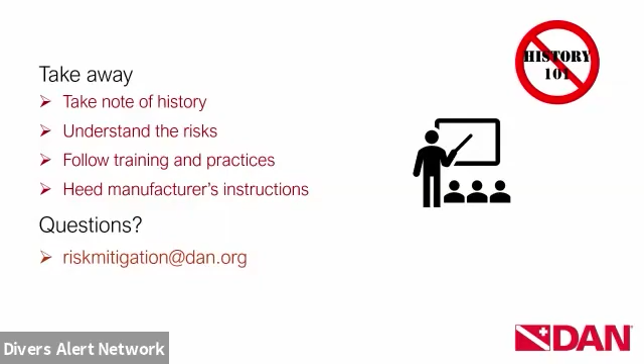If you're taking that down with you, if you're buying the hose whip that is going to contain 3,300 or 4,500 PSI of gas in it to fill cylinders at your dive shop, you want to make sure that it's bought from a reputable supplier, it's properly stamped, it's marked with all the coded markings you require. CGA and DOT will tell you what those markings are. We need to pay attention to them for very good reasons.

So I've covered a fairly broad scope of things, and the intention is not to scare you other than to make you aware that we need to bear in mind a clear understanding of the risks if we want to be able to make sure we don't get on the wrong end of an accident.